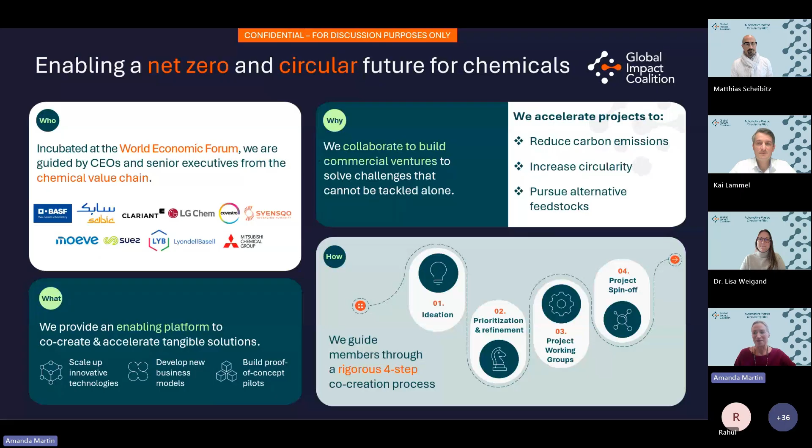And when I say technical, what do we mean by this? So it's basically starting to look at, can we remove plastic parts from the cars? Can we then also process them? Can we shred them, sort them? And which yields and purity levels do we achieve at the end? And the economic feasibility is then, at which cost basically can we remove the plastics and generate the feedstock.

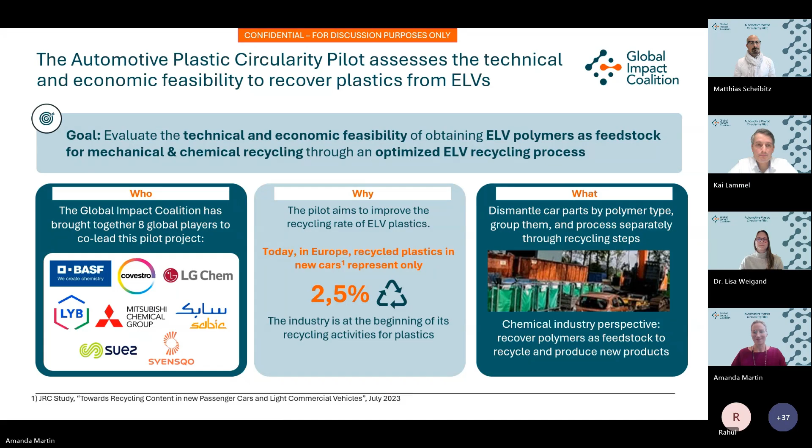And then in the next step, what I mentioned on the last slide, we grouped these car parts along the target polymer compositions into 22 groups and ran them separately through the process. The first step was shredding that we conducted in Germany. And then we had a two-step sorting approach. First, we had a sorting trial of the material to look at the purity level and also to be able to conduct some changes in the sorting process, some improvement steps, before we then conducted the full sorting of the main fractions.

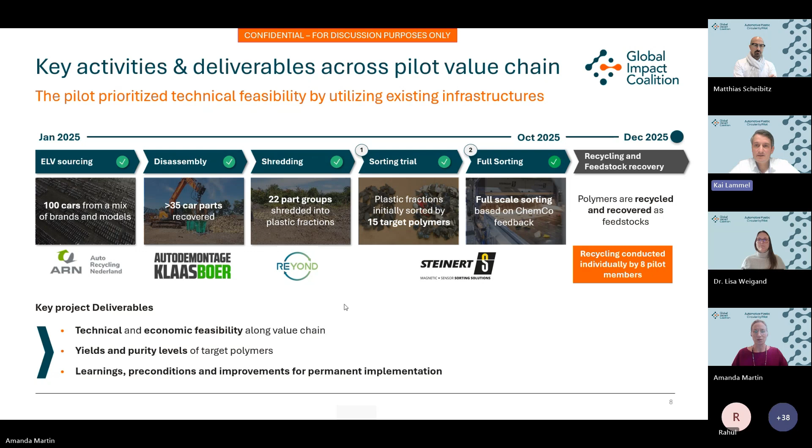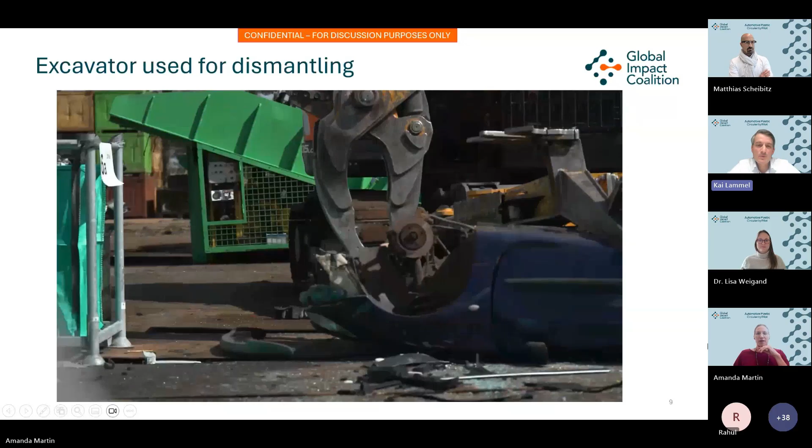And to give you a little bit of flavor of how the first step, the disassembly, looked like, we brought a little video to show you. And we can move to that now. What you see here is the dismantling process with the Scorpion excavator crane. The crane is normally used to dismantle metal parts from cars, but we used it here for plastics.

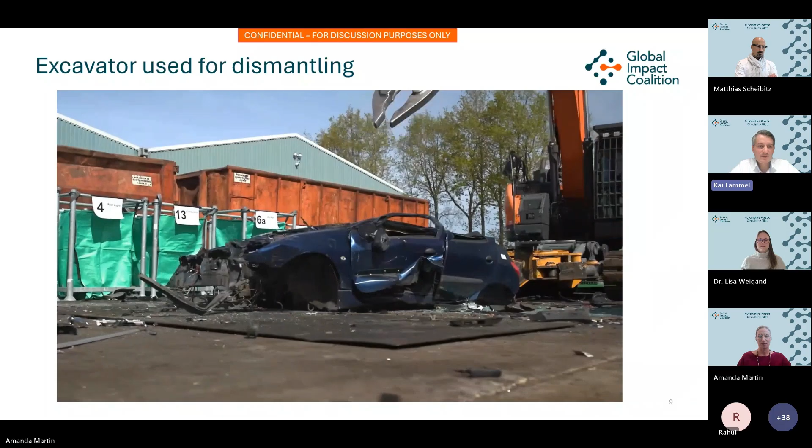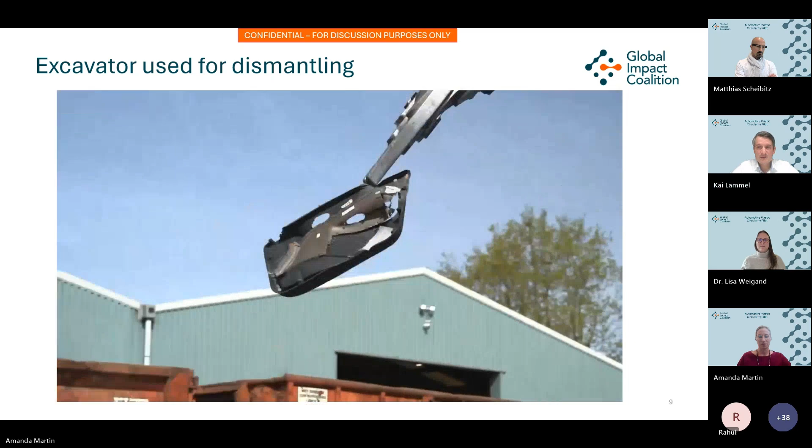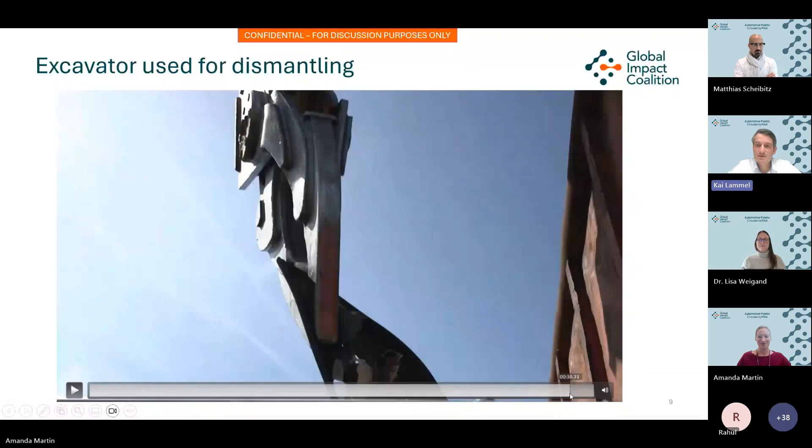You see also in the background the big bags where we sorted and separated the different car parts that we collected. And I would say it worked quite well so that the crane could also take out plastic parts. You see that here in the door to separate the plastics from the metal part, just to give you an impression on that. And with that, to have an overview on the general learnings across the steps that we had, I hand over to Lisa.

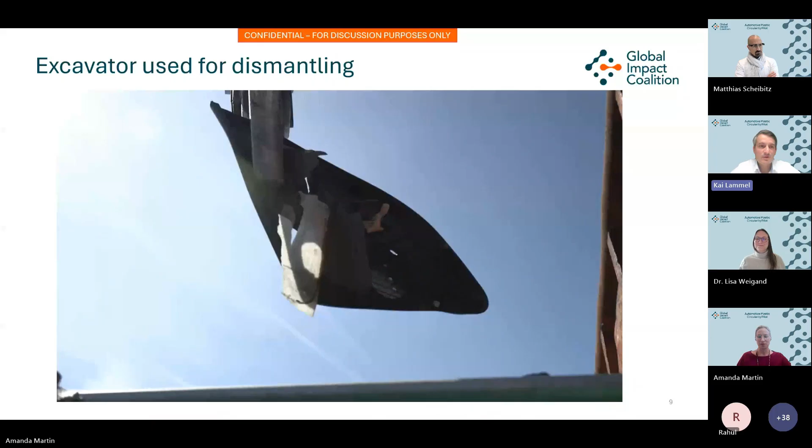So as Kai already told you, we have completed dismantling, shredding, and sorting, and we are happy today to share our first key learnings with you now that we have reached these important milestones. So first of all, the fantastic thing that we have discovered is that our hypothesis of using the excavator to improve dismantling proved to be quite successful. So we have shown that this was really feasible, and we were able to remove over 50% of the plastics per car across all of our target polymers.

And then we were able, when we looked at the whole process, to create this categorization system of the car parts, and we grouped them together by effort and complexity of dismantling and shredding, and we will now use this information as a basis to create the business case for the different groups.

For the shredding, it was also very successful, and Matthias will go into more detail about what we have discovered here. But of course, when we are looking at the material streams from dismantling up to sorting, what we found is that we were facing some losses in the material, mainly due to contaminations or paints that had to be removed, multi-material parts that we could not use as is, or just because parts are glued together and so on and so forth.

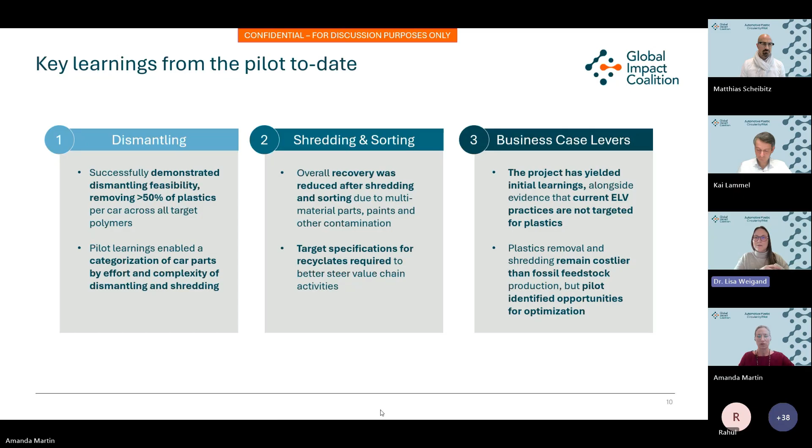All right, now I want to share some more insights into what we have learned during the dismantling trial when we were on the ground. And one thing that was really fantastic for us to see is that some of the plastic parts can be collected quite easily. And this is mainly the plastic parts that are connected around the metal dismantling of the car. So for example, for metal dismantling, they will take out the copper wires, so we will have easy access to the connectors that are attached to those.

Also, in preparation for dismantling of the cars, a lot of the plastic parts are being removed. For example, the underbody shield is being taken out to get access to, for example, the motor to drain the fluids and these kind of things. So access to the underbody shield is quite easy for us. And the wheels are taken off as well, so wheel covers can be accessed also nicely. So this is really fantastic.

Also the exterior parts like the bumper, mirror housing and so on, it was quite easy to recover with the crane. And this is very positive for us. We are now going to analyze it further, as Kai already said, and to really look into the technical feasibility of this as well. Next slide, please.

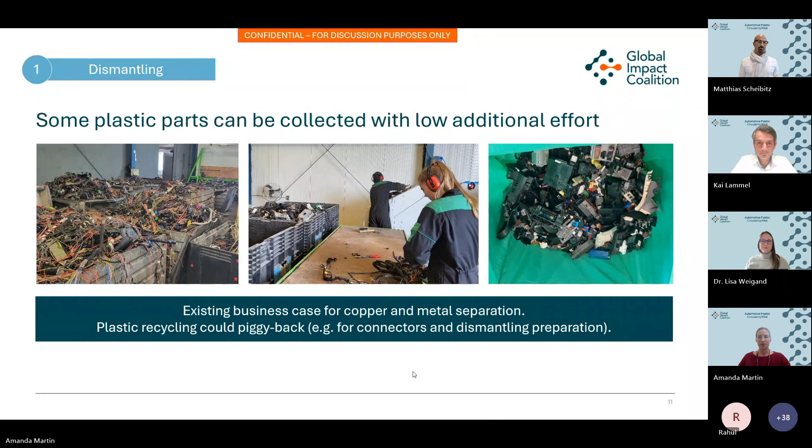But of course, where there are positive findings and easy things, there are always some challenges as well that have to be faced. And it was the same case for us. There were some plastic parts that, using this approach with the excavator, were a bit more challenging to remove. One of the examples is the rear lights. So the rear lights are mainly made out of PMMA and other polymers.

And the challenge that we faced here was that the excavator doesn't have a pressure control, and PMMA is actually quite brittle. So when the crane operator removed the rear lights with the excavator arm, the PMMA would break, it would fall to the ground, and then it was very, very difficult to recover for us.

So thanks to the ingenuity and adaptability on site, we actually came up with a new way of extracting this kind of polymer during our trial. And you can see here on the left-hand picture that the guys actually manually removed the PMMA lens from the rear lights. Of course, we understand this is not the optimized process yet, and this is not how it hopefully will look in the future, but it will give us the opportunity to look at the material and still assess purity, quality, and feasibility for recycling.

Another more challenging group of parts was really the under the hood parts. And that was mainly because they were sometimes really difficult to reach. Sometimes they were glued in or screwed in. So it was very, very difficult to extract them. But also here we are seeing that, even though we have faced some challenges, this is not the end of the story, and we will not directly rule out these materials for recycling or a closed loop approach.

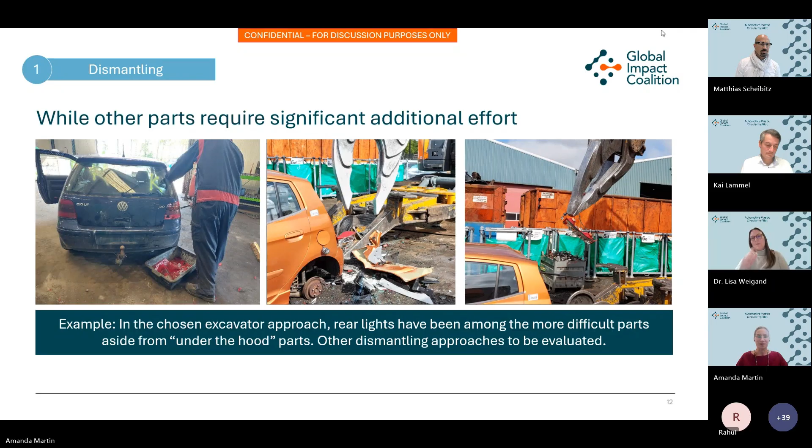The last group of car parts I want to talk about are the ones that are attached to metals. So here I have two examples that I would like to discuss with you. The first one is really around seats. So you can see here on the picture we have the foam cushion, and that's really in the structure of this metal frame to give the shape to the seats. And for the end-of-life cars, it was quite easy to dismantle, but then it was a little bit more challenging when it comes to shredding because of the big metal pieces. And I think Matthias will talk a little bit more about this in his presentation, so I will not give away too much here.

But talking about the dashboards, of course, not only do they contain metals, which makes it a bit more challenging when it comes to shredding, but also we saw that they are a wild mix of 1-component, 2-component, and 3-component dashboards. And currently, for end-of-life cars, we do not have any data available on which brand or model uses which type of dashboard. So that made it quite challenging because it's also a material mix, and further processing was then a bit more tricky for us.

And when it comes to the dashboards, we have also seen that further pre-treatment, especially for the 2K and 3K dashboards, is required to separate the multi-material mix. But here, most of the processes are also not on big scale development yet, so they're still not really working for end-of-life vehicle components, and there are still some pre-treatment and process development that has to be done.

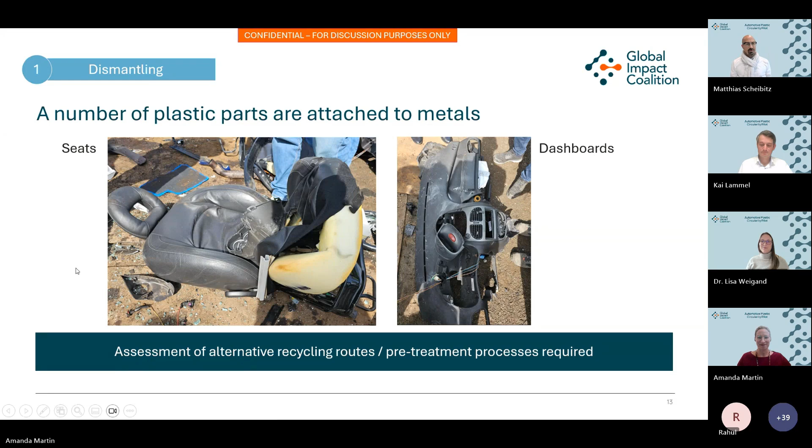As indicated by Lisa, let's talk about shredding and the shredding challenges in automotive plastics recycling. Some parts like the bumpers or the skid plates, or sometimes we call it underbody shielding, are rather easy to shred. So these are quick wins for the recycling. They can directly go into the further process with rather minimal effort. But not all parts are this simple.

So the carpets or the airbags you see here on the right-hand side, for example, cannot be shredded with standard equipment. They require alternative technologies or special treatment. The airbags are incredibly stable, let's say, and rather cause problems in standard shredding processes. This means we still need to develop new solutions for these components.

And in general, I would say it's important to identify which parts are easy and which are difficult early in the whole process. By focusing on the easy to shred parts, like on the left-hand side, first, we can quickly increase the recycling rates. At the same time, we also must think about investing in research for the more challenging materials like the carpets and the airbags, for example. So next slide, Amanda, please.

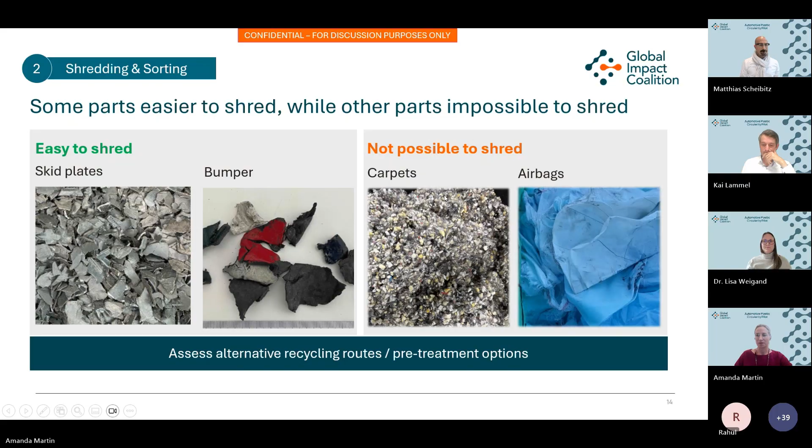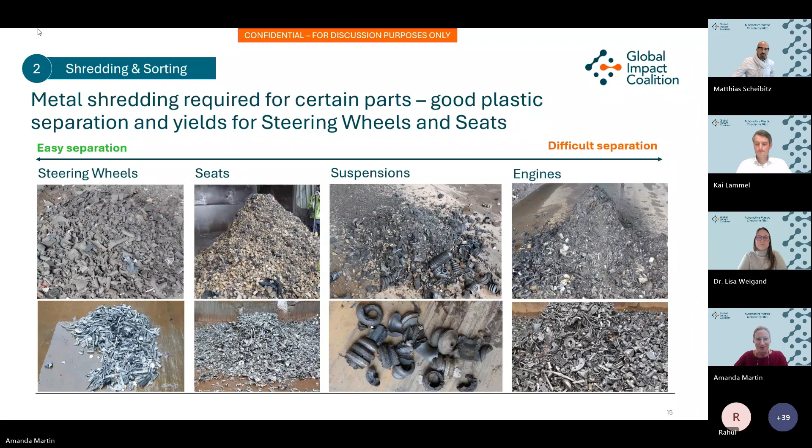So let's have a look at the big picture of the whole car. Our data shows that over 80% of recovered plastics parts can be easily dismantled and/or shredded. So that's what we think is a strong foundation for scaling up recycling. As you can see here, we clustered all modules that were mentioned by Kai in the beginning into 4 groups according to how well they could be dismantled and shredded.

For example, the headlamp systems on the upper left side are easy to shred, but rather difficult to dismantle, while the bumpers are both easy to dismantle and to shred. On the other hand, in the lower left corner of the diagram, jounce bumpers are neither easy to dismantle nor to shred. And the carpets, for example, are easy to dismantle, but challenging to shred, as we saw before.

So this categorization helps us to prioritize our efforts. So we should focus first on the upper row, I think, on the easy categories to achieve quick wins and quick progress. Next slide.

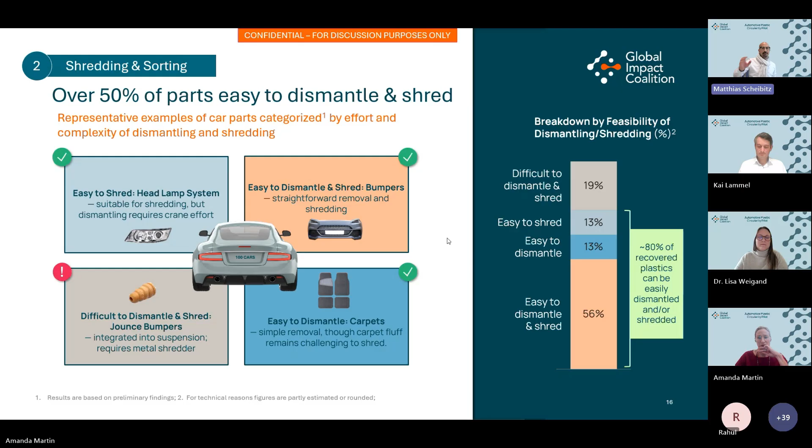So let's dive into a specific example, fans and shrouds, which are part of the cooling system of the car right in front of the engine. So our first sorting samples show promising results, as Kai mentioned. So we started with understanding what the fractions look like. After dismantling, about 60% of the material is polymer fraction, while close to 40% is only dust and waste, so we didn't process it further.

Within the polymer fraction, we see high quality polyamide and PP fractions. Most of them, of course, due to the mechanical requirements, contain glass fibers, which is another topic later on in the recycling process. This means that with the right processes, we can recover significant amounts of pure plastics fraction from these parts. However, there's still room for optimization. We need to further improve sorting and processing to maximize at the end both yield and quality.

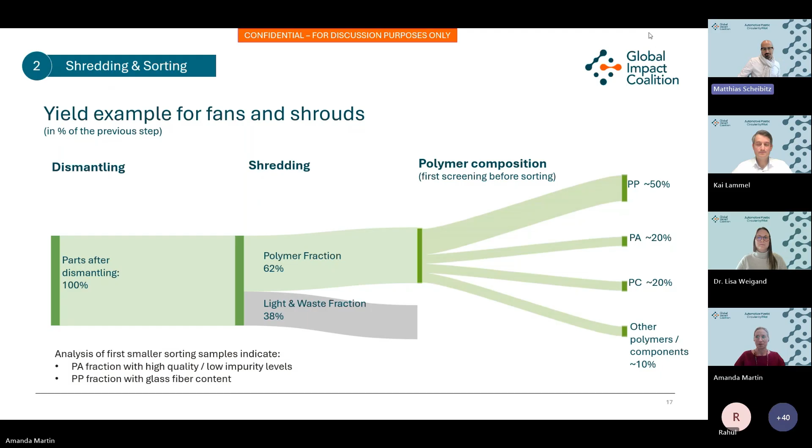Now come to the next slide. So the most important question probably all of you are interested in: what will make plastic recycling in automotive truly viable at the end? First, we need to optimize, scale, and digitalize our processes. This includes improving the design of dismantling equipment. You saw the excavator in the movie. Optimizing on-site organization. Also, you could get a glimpse of how we positioned the big bags, for example, as well as optimization of dismantling and shredding.

Centralization is another key lever. Large-scale recyclers can help us achieve economies of scale, and chemical companies like us, BASF, or the colleagues from Covestro or Mitsubishi should be embedded in the broader ecosystem. And I think we made a first step here to bring our know-how also into this pilot. Digitalization and automatization are crucial. Using databases and robots for smarter disassembly will boost efficiency and consistency.

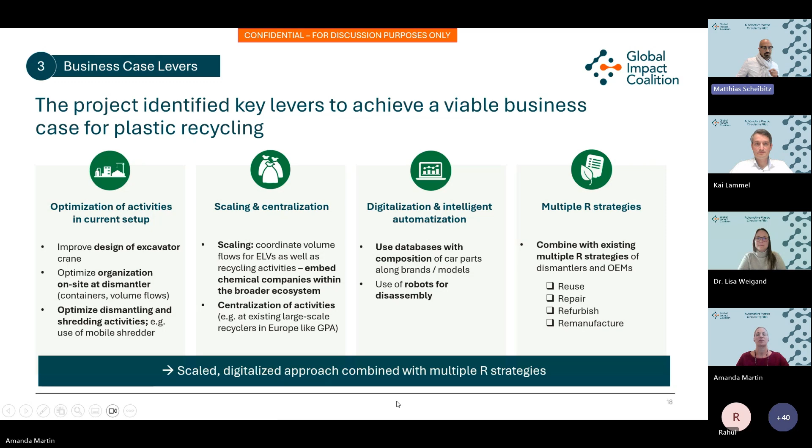Finally, we must combine recycling with other R strategies, namely reuse, repair, refurbish, and remanufacture, because this maximizes value and reduces waste. By pulling these levers together, we as a team here believe we can build a viable business case for automotive plastics recycling. And next slide.

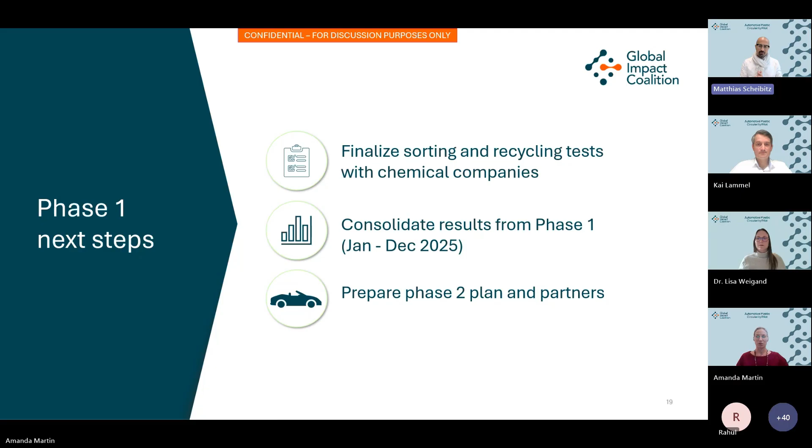Let's close the first part of today's seminar with the next steps for phase 1, which we are still in. Our immediate focus is to finalize the sorting and the recycling tests conducted by the chemical companies in the project. All outcomes produced throughout the year will be consolidated. This will give us a comprehensive view of what really works and where we need to improve. And next, we'll prepare for phase 2. But before we talk about phase 2 in more detail, I hand over to Amanda for a first quick round of Q&A.

Over to you, Kai, to explain a bit about where we go from here. Exactly. Yeah, Matthias mentioned it already. We are now preparing phase 2 of the project, which is about to start in February 2026. And we wanted to share with you today the direction in which we are thinking. It's not detailed out yet, but we want to share it early with you, also to get your feedback, to see where your interest is in these options that we have here. And I'll briefly go through them.

One thing we're thinking of for the second phase is a component-specific case. I said we looked at 35 different car parts, and the idea would be now to choose 1 or 2 and to really create a viable business case around these parts. The parts can be chosen because they're high volume or easy to dismantle, but they can also be parts that have a high value, and we would select them and then create a pilot around this. So this is A.

Then option B is much broader. That is crafting a blueprint for how to scale up the recycling of plastics from end-of-life vehicles in a certain regional scope, and creating a roadmap of what needs to be implemented to get there, to really bring the cost of the recycled material down. Matthias shared the overview of what we have in mind. This would then need to be incorporated in this future setup. You can think of it as a little heat map where we say what the highest levers are to bring costs down and to start with.

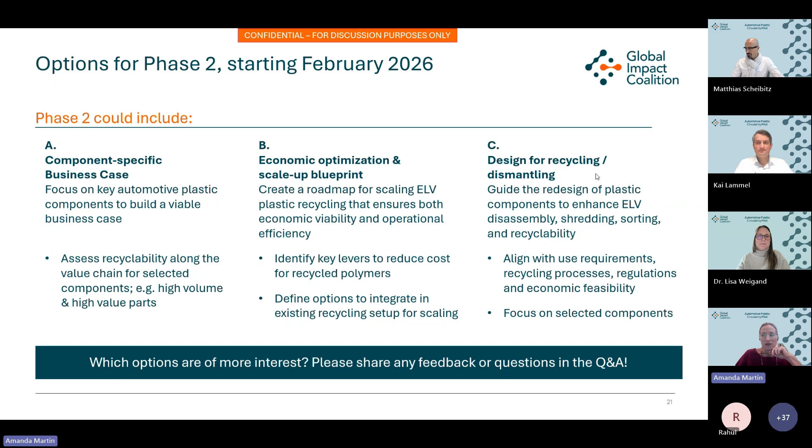So then, in the interest of time, I'll go to the last slide here. So Kai, you want to just share this one? This is me sharing this one. It's you, but I'm happy also to.

This is really the outline of the plan for the next steps. We would like to kick this off in January with a presentation in Davos, and then kick off activities in February of 2026. So moving fast, because there's a lot to solve and little time to do it, and we would really welcome your engagement and collaboration on this.